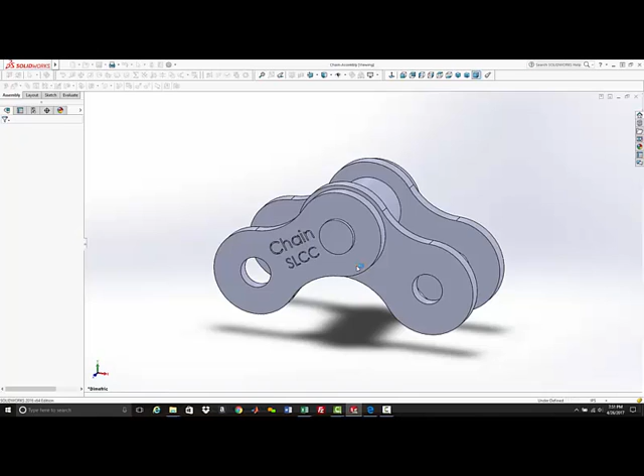And so there it is. If you were using a version earlier than 2016, you would have to come in and open up this step file. I'll show you how. Go to file, open, navigate to where that folder is, file, and I've got all files here. Then open up the step file, double click, and it will process it and open it up.

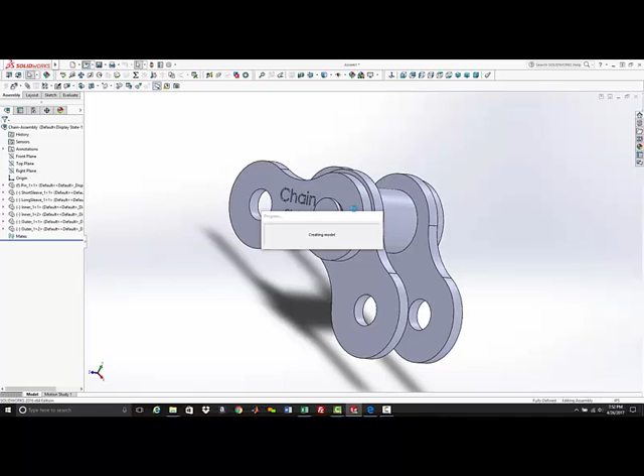Either method is acceptable as long as you get the parts into SolidWorks. I like to have my lines edge showed, so you can see that nothing is constrained here.

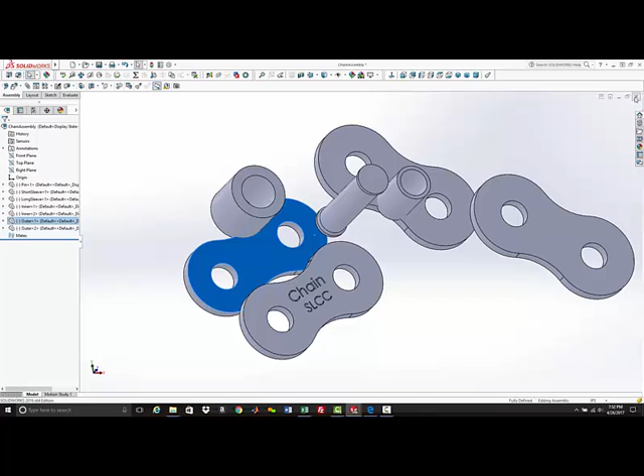So anyway, this was a step file. I'll delete that and work with the other file. This is the file that came in the SolidWorks format. As you can see here, this pin has been fixed in place.

I noticed in the grading that some of the pins were not fixed in place. I'm assuming that those came in through the step file. I did not dock you for that, but I did make a note that you probably should have fixed that pin. It just makes your assemblies easier.

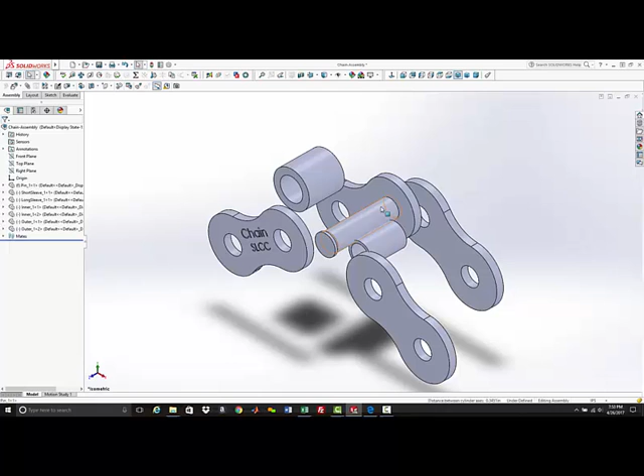So first thing I'd do is move these out so that I can get into doing my concentric mates. I'm going to click two surfaces and it'll automatically pull up this window. I'm holding the control button to select the two different surfaces and hit concentric.

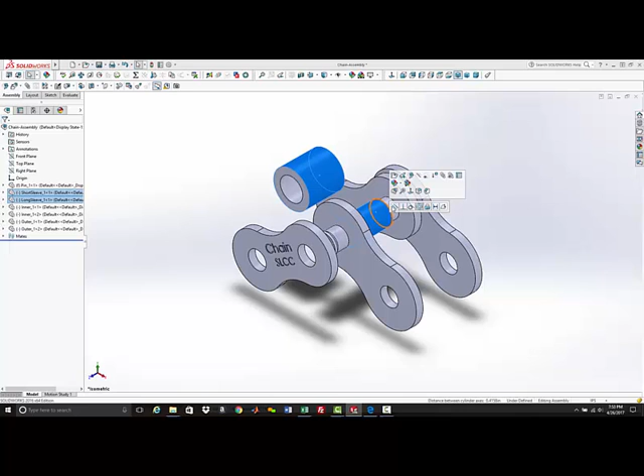Control button, pick the two, control button, do all those. We're going to make this one here. This is an inner bushing and this is an outer one. Okay, so now we have everything lined up concentrically to the pin.

So next thing we would want to do is start our coincident matings. These two here are the same length, so we'll just grab those two edges and mate them.

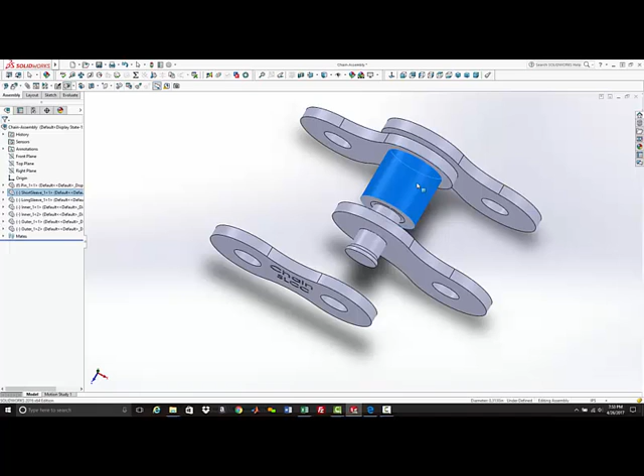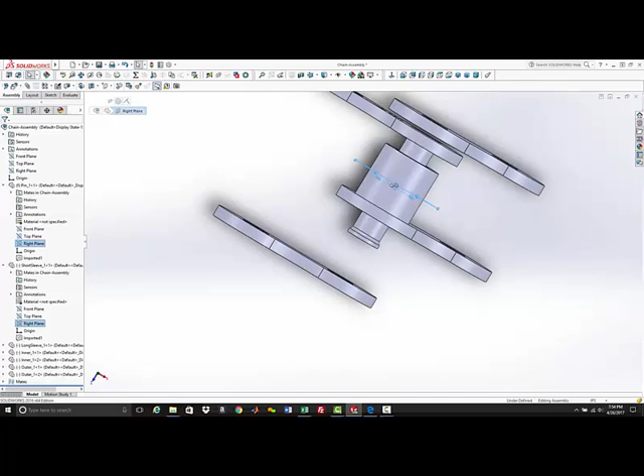And I know if I was designing this part, let's see where they've got their planes at. That one's in the middle of the part, and this one here is also okay. That's one thing I like to do when I'm designing my parts - if you build things symmetric about the plane and you want to mate those things together, you just grab the plane and mate them, and now that thing is symmetric about the axes.

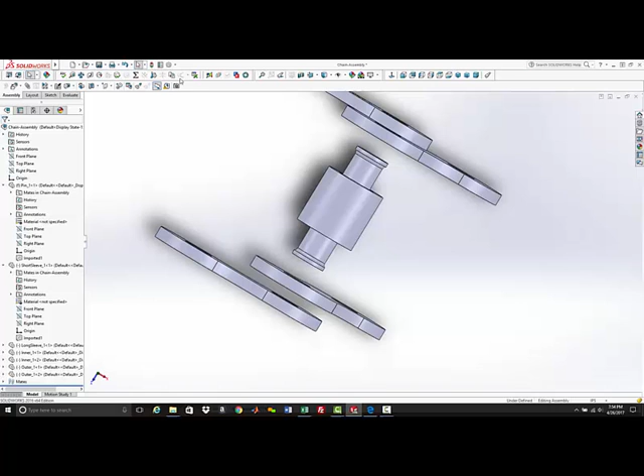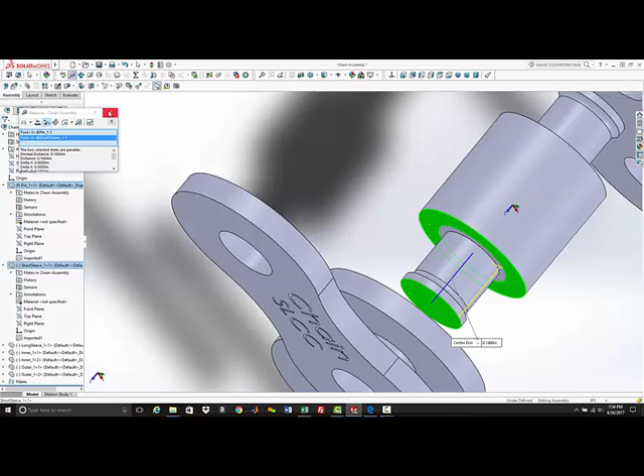If I close this off - is my measure tool up? Yeah, if we measure, you'll see from here to here is a normal distance of 0.1604, and from there to there is 0.1604. So that has put those right smack dab in the center of the part, which is good.

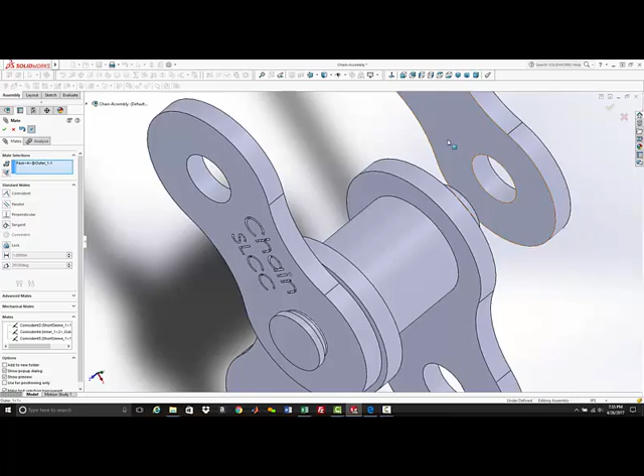So this is another method of mating too - opening up the mate tool box. This doesn't require you to hold the control key to select your parts. You just select the two parts that you want to mate, and it'll default to the most accurate, or most probable mate that you want, and all those went in coincident.

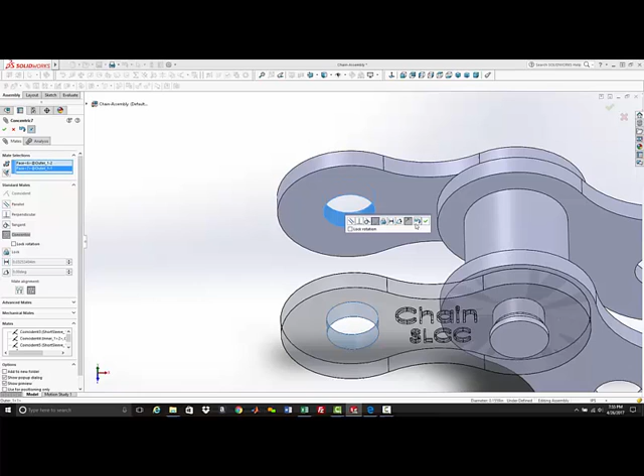Okay, so now everything is mated in coincident. Quite a few of you stopped at that point. I didn't mark you wrong if you didn't do this, but it's a little nicer if you link those so that as you move one, they both move. It wasn't specified in the instructions, but I think it makes a much better assembly if you mate those together so they move.

Because in an actual system, with another link going down, those would move in tandem with each other.

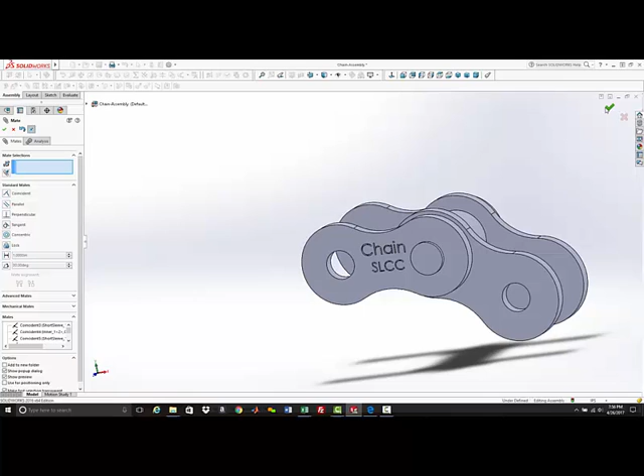So there is step one of the exam, and I do have the PDF open right here. So we've created the assembly fully defined - not completely fully defined, because these are still movable, but I'll bring that up in the extra credit portion.

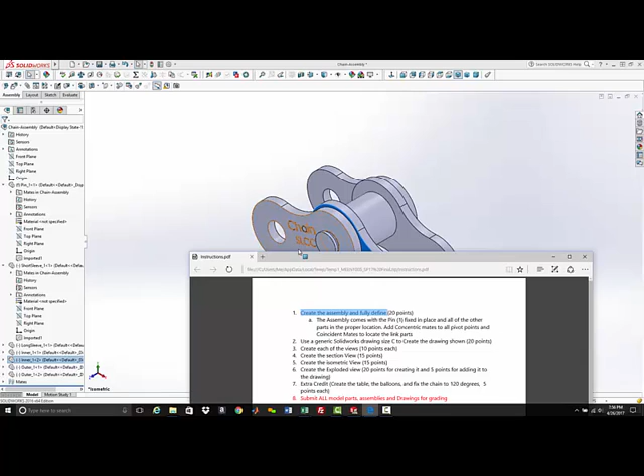Where'd my PDF go? Oops, not that one. This one. So the pin was fixed, we did the concentric and coincidence mates, so we've got part one done.

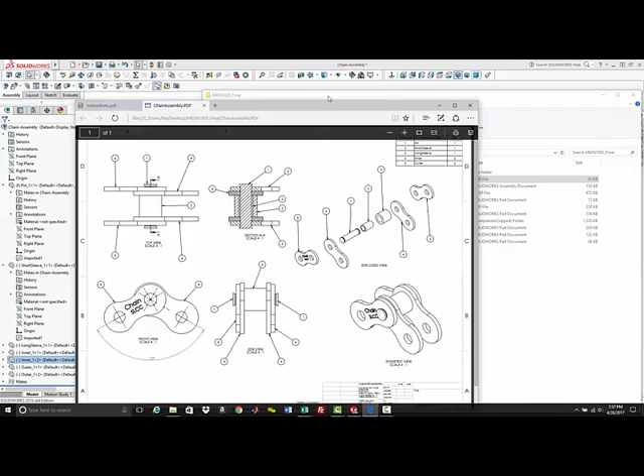Part two: use a generic SolidWorks drawing C to create a drawing, the one shown. Okay, so let's call up that drawing to see what it looks like. So this is what we need to create for part two.

And we want to make sure that it's in a C size sheet. So there are several ways to get this part into a drawing. We're going to go ahead and save this, rebuild and save. The way I like to get my parts into a drawing is simply push this button right here, which is a link that will open up a drawing, and we're going to select the C. Okay, and it brings that part in.

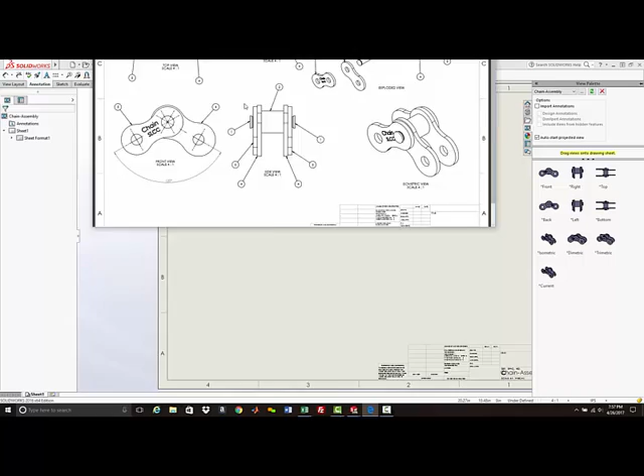Well, it should have brought the part in. So now we're going to pull up all these views that are in this drawing. We'll need a front view, a right view, and a top view, and then from that we'll get our section view. We'll create an exploded view and our isometric view.

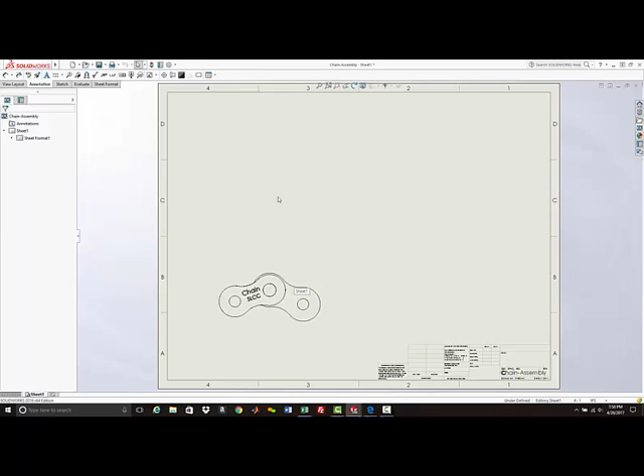So we'll start with the front view. We'll grab that, bring it down here, and do our top view, our right side view, and the isometric view, and right mouse click to end that edit, and this is placed over here.

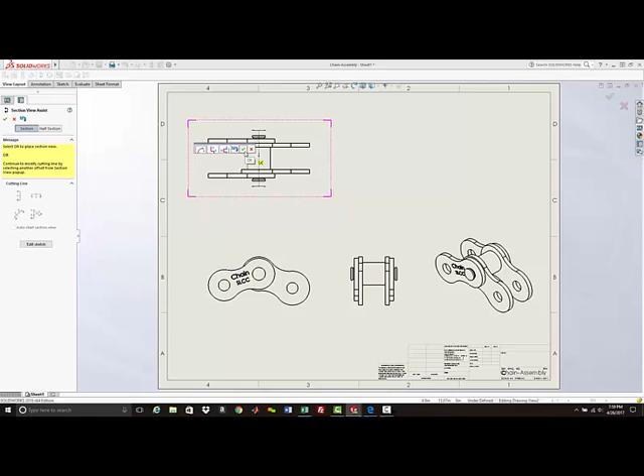Okay, so there's those views, and then we need to do our section view right here, section AA, showing that. So we'll come up here to this view layout and click on the section view, and we'll come to this view here and let that snap to the center, and that's all we want. So we'll say OK, do auto hatching, exclude, and OK, and then bring this right over here, and there's our section view.

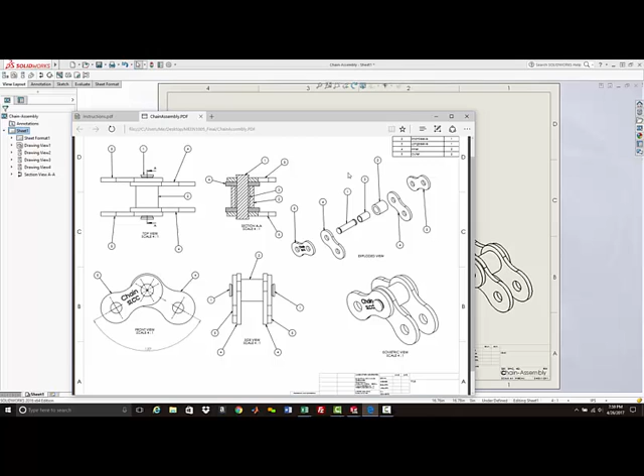So now we need to go create our exploded view because we don't have that. I'm going to use this here to create the exploded view so that it'd be the same. So I'm just going to right mouse click on there and go to here to open up that assembly.

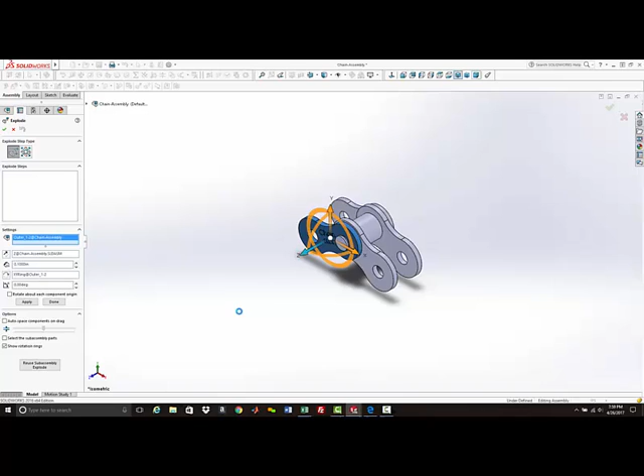We'll go to the exploded views, which is this button right here, and I'm going to leave the pin fixed and move everything else. So we're going to grab this guy here and move it down a ways, grab this guy and move it down a ways, and then we're going to take this one, we're going to move it out. Nope, not that way.

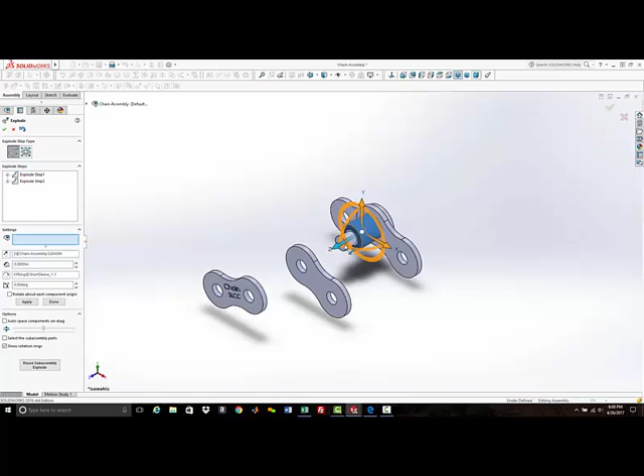That was wrong. We want to go this way, and I'm going to move a little bit further because this one here needs to come right here, and then this one here needs to go out here, and this one here needs to go out there.

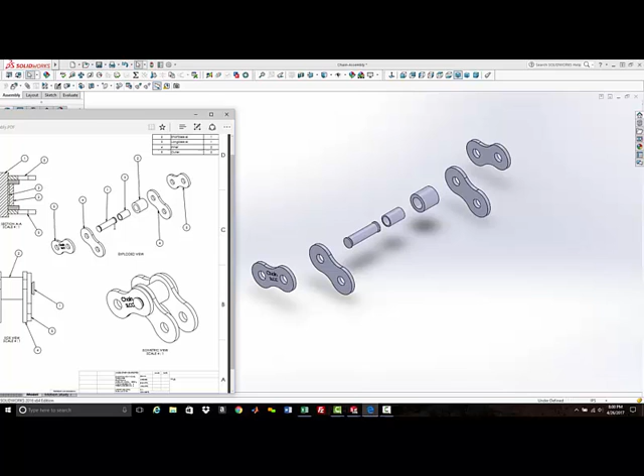Okay, so that is basically the same as what we have here in our drawing. The spacings may be a little bit different, but it's still a general idea. Okay, so we're going to save that, and if we come over here and collapse that, because we're going to need it collapsed for the last extra credit part. So now let's go back to our drawing.

I'm hitting Control Tab to pull up the open documents, and just click on that one. And right here we're going to insert our exploded view. So if we come to the view palette, okay, it says it's out of date, so we're on the chain assembly. Refresh the page, that'll bring all that up. And right here is the exploded. Now there's a couple ways to do this.

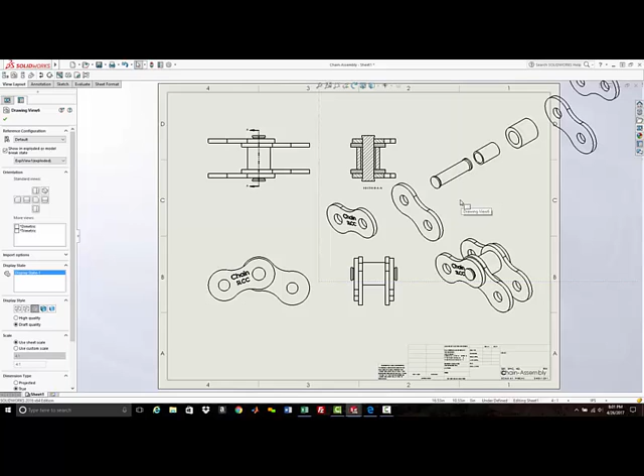We can do the exploded view, okay, and we're going to need to scale that down just a little bit, and we'll just click on this guy here, custom scale, go 1 to 1's a little small, 1 to 2's even smaller. Otherwise stupid. Hey, don't call me stupid, that hurts my feelings. Okay.

Now it does not necessarily have to be tied. See, right now it is tied to that view, and we don't necessarily need to do that. So we can right mouse click on it, go to alignment, and break alignment, and now we can move it to wherever we want.

Okay. Getting a little crowded here. Okay.

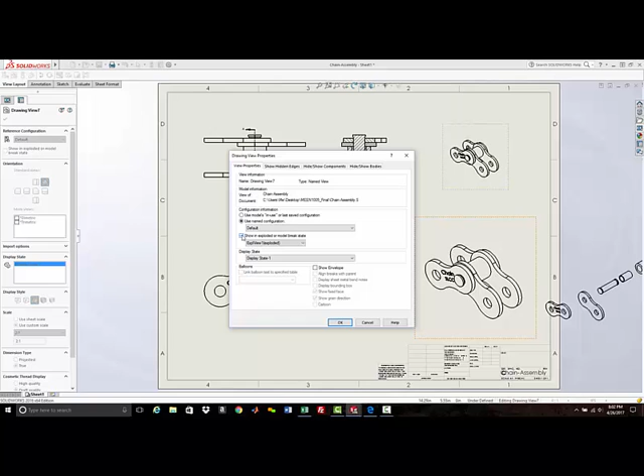So the other way you can have done that is, let's just move this guy over here for now. If we go back to this guy, pull up the isometric view and bring it in here. Let's change our, click on that view, change to the 2 to 1 scaling, and then if we right mouse click on that and go to properties and select show in exploded view and hit OK, it'll explode it out. So either way will work.

Okay, I'm going to delete that guy. Yes, and bring this back here. Okay, so there's our drawing.

That was problem number 2 in the instructions. Oh, that was problem number 2, 3, and 4, and 5, and 6. Wow, look at that. I just did the 6 problems.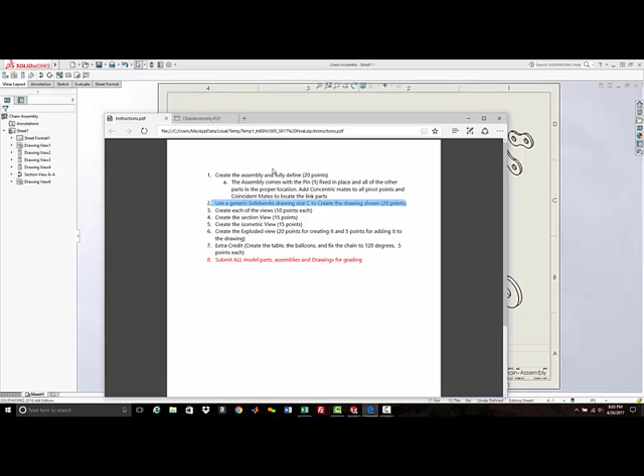We created each view, which I did, the left, right, front. 4 was to create the section view. We did that there. 5 was the isometric view, which is this one over here. 6 is the exploded view. And number 7 is the extra credit.

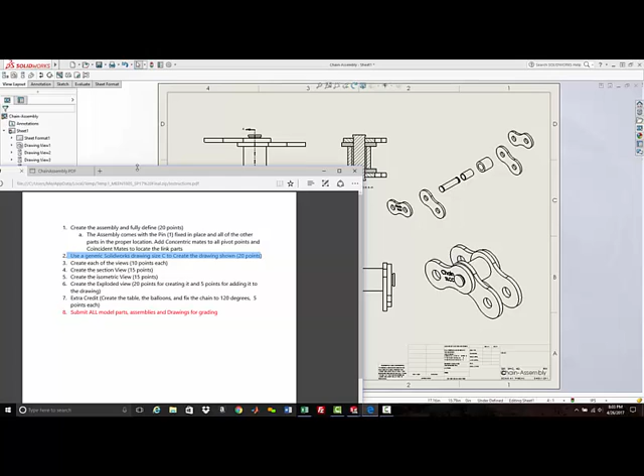Okay, the extra credit is to create the table, the balloons, and fix chain to 120 degrees. Okay, so the table is basically a bill of materials. We'll do that last. Let's go in and now we need to establish the 120 degrees that is required for problem number 7 for the extra credit.

There's several ways to do these. One thing that's really difficult in SolidWorks is putting dimensions where they're not normally put. So I like to cheat a little bit. Basically what I've done here is...

Again, I tabbed to go back to my drawing. If I right mouse click on that part and go up here to open part, it'll open up the part for me. I'm going to, where's all my views at?

Standard views, there we go. I'm going to look at the right side of this thing, and I'm going to put a sketch on here. Again, this I wouldn't expect you to do this way - this is just something I've been doing over the last 100 years that I've been working with SolidWorks.

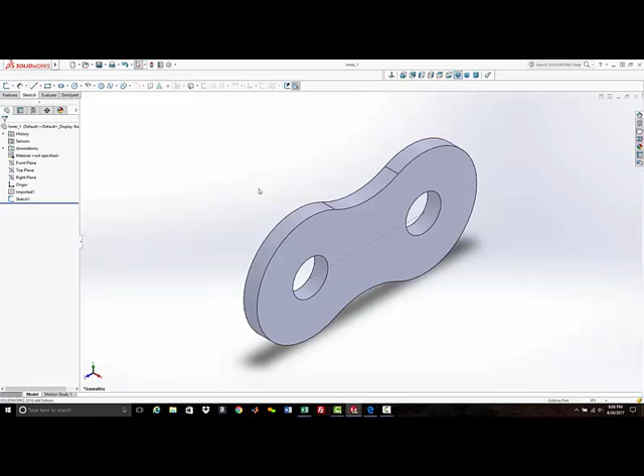I'm going to put a sketch there, and go back to the isometric view and save it, Control Tab back to my drawing, and pull off this part, doing the same thing. Right mouse click, go to open part. Don't want to do that. Again, I'm going to go to the right side view and do a sketch.

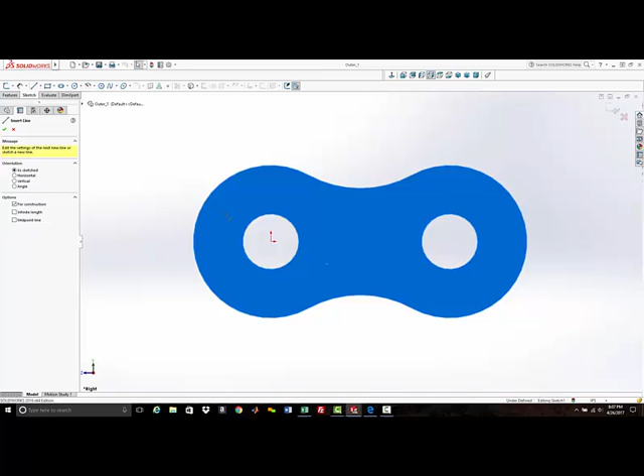From there, to there. And then if we go back into our sketch, and if we click on this part, and come down here and right mouse click on that and show that sketch - there's that line. And this part here, go show that sketch. And now if we do a dimension from that to that, we'll see that it's really, really small.

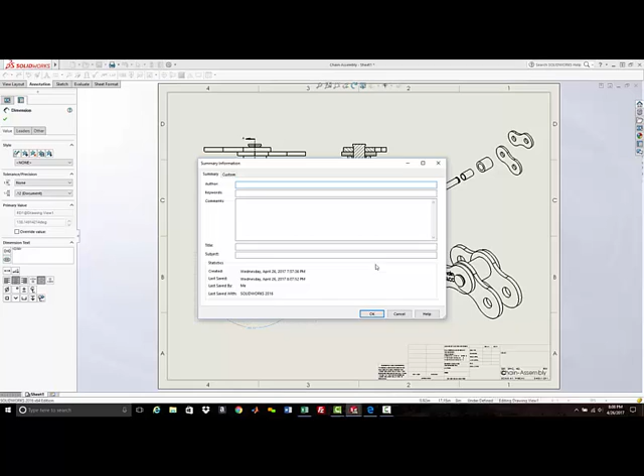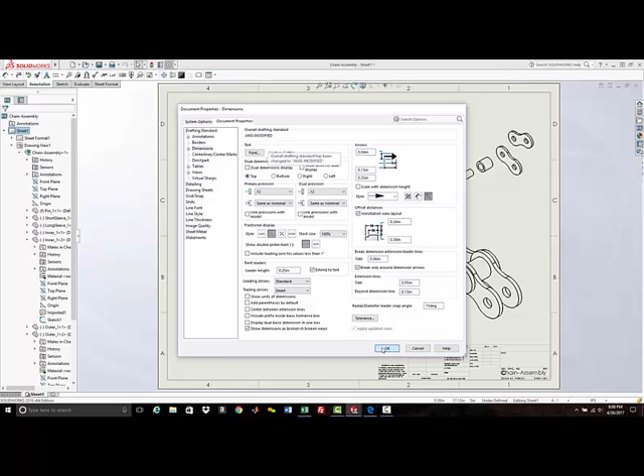Let's go to our properties for this page, document, dimensions, arrows, offsets, font, and let's go up to a 20 font. Okay, so there we can see that we're at 138 degrees, and we want to make that 120.

So how do we do that? Okay, this is how I would do it - again, there are several ways to do this. I'm doing a Control Tab, going over here to my assembly. We're done with these drawings, so I'm going to right mouse click on them and hide them, just because they're kind of annoying.

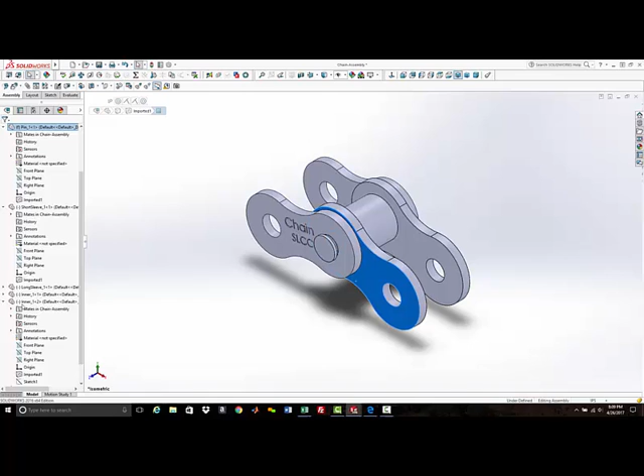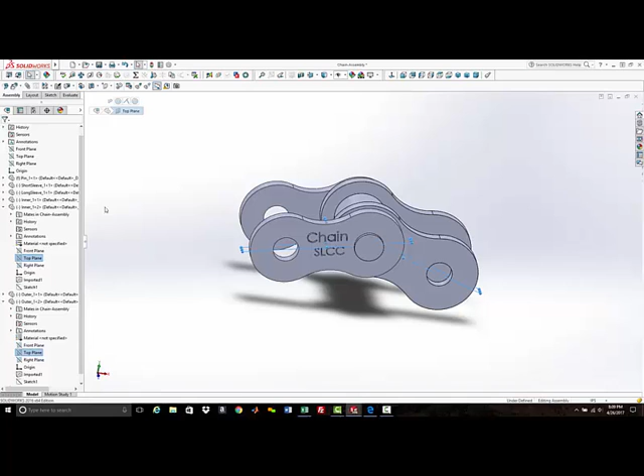And hide. Okay, so we have these guys here that are tied to each other, and we want to make them 120 degrees. So if we grab this guy here and close all these other ones, go this guy here, open, and we see that that plane there is running down the direction that we want to tie our 120 degrees to, and this guy here would be the same thing, that one. So if we take that and that one - I got the two top planes - and do a mate.

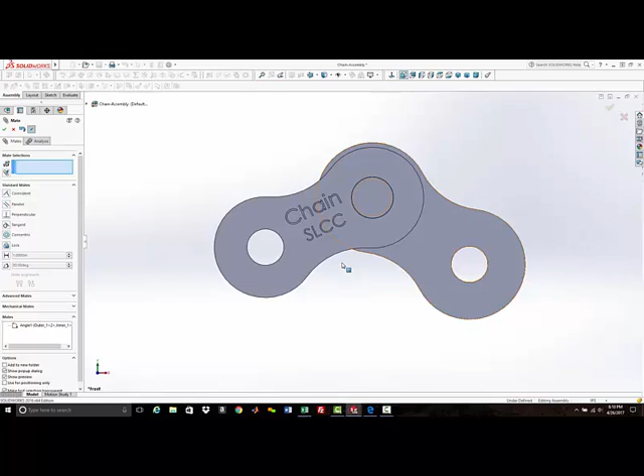Okay, it's coincident, but we want to do 120 degrees. Okay, so now they're always 120 degrees from each other. Now we want to get that so that that is symmetric. Why are you not showing my axes?

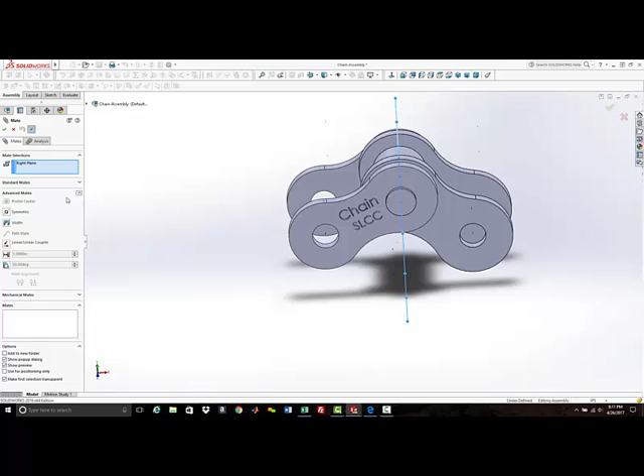Hide show temporary. So now to get these so that they're symmetric about the - what was that - the right plane. If we select the right plane, go to our mates and come down here to advanced mates, and we want to do a symmetric, and we want this axis and that axis, and it is now symmetric about the plane. And we can go back up here to our view, hide show, and turn off our temporary axes.

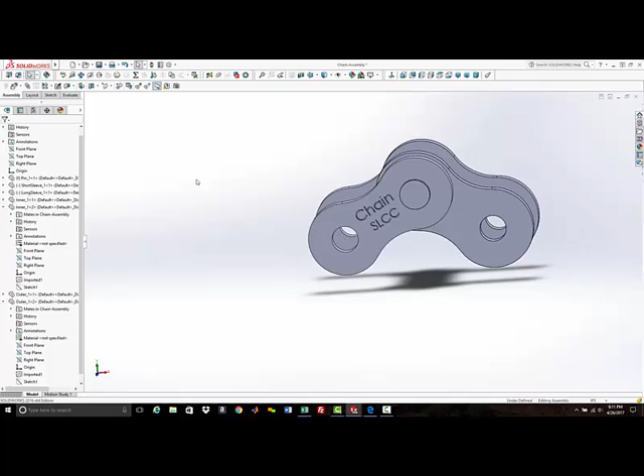Turn off the axes. And now that is set to where it's 120 degrees symmetric about the right plane. Again, if you set it at 120 degrees, it didn't say anything about being symmetric about the plane - that's just some of my OCD kicking in.

Okay, so we got 120 degree set, so now we need to add the table and the balloons. We select one of our - I'm going to select this view right here - and we come up to tables, bill of materials, and top level only, and we'll hit that OK and come and lock that in place right there.

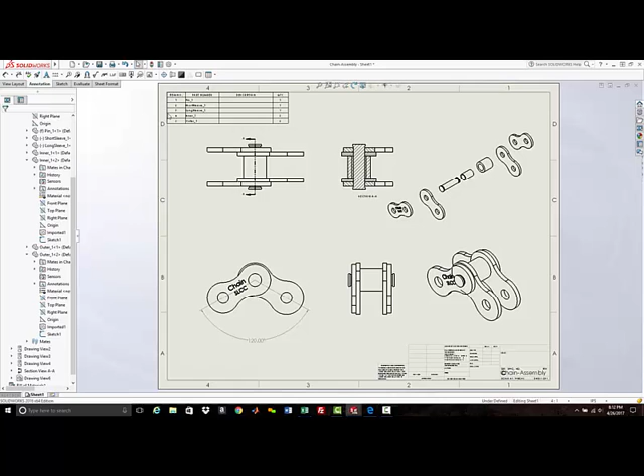So now if you scroll in here, if there was a description for each part, it would show up in this bill of materials. So we have pin, sleeves, and inners and outers. Okay, so now to make it identical to the drawing - okay, I'm in the other corner, but that's okay.

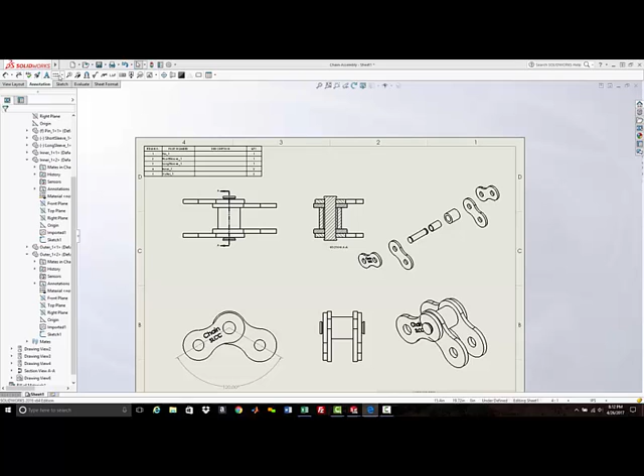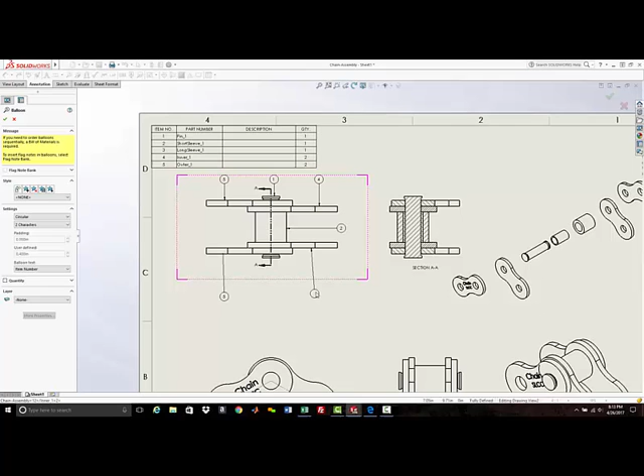Now we'll hit our balloons, and we have a balloon on this one, a balloon on this one, a balloon on this one, a balloon on this one, and just so on and so forth. So there's a lot of balloons.

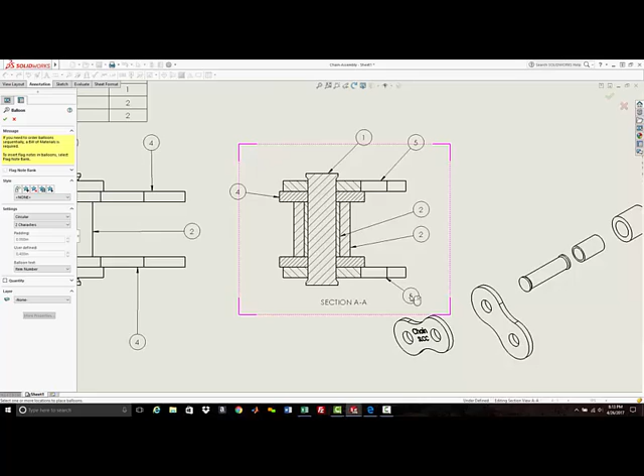Personally, I just do it in one view. But this is good because especially in this view, you're seeing number 2 here that you don't see in a regular view. And then I'm going to come off to the bottom because the top has run-ins to that other. Oops! Oh, I missed. Oh, okay, that's okay - we'll just come back and delete it.

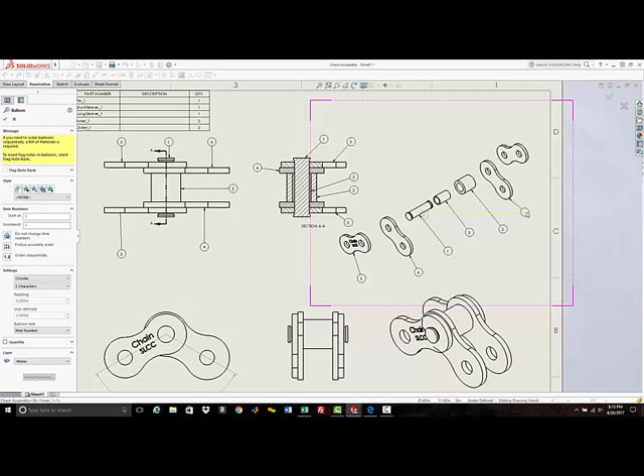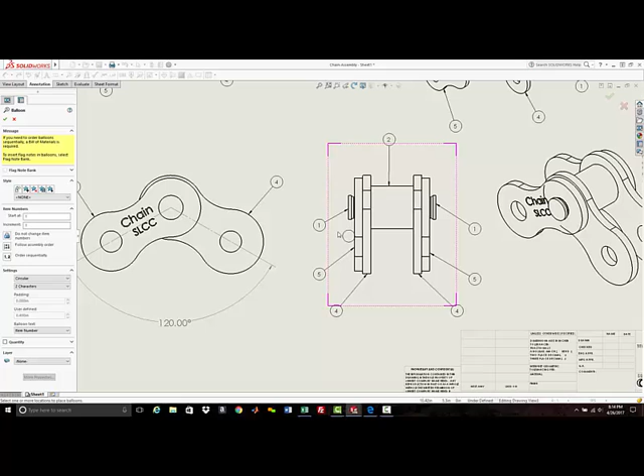And there you have it. I guess if you want to label your views, you'd click on the text box over here, put it down here, and exploded view. Control all, and let's make that a little bit bigger.

And there you have it. That is how you should have had to do that exam. Let me know if you have any questions.